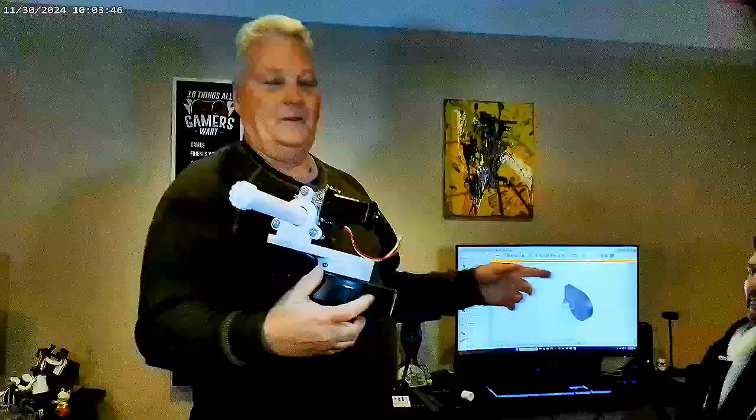So I had to have somebody do that, and Pete, my son, designed this and did it on a 3D printer. So this is my son Pete, and he'll explain how that's done on the computer. This is new technology being used on old technology.

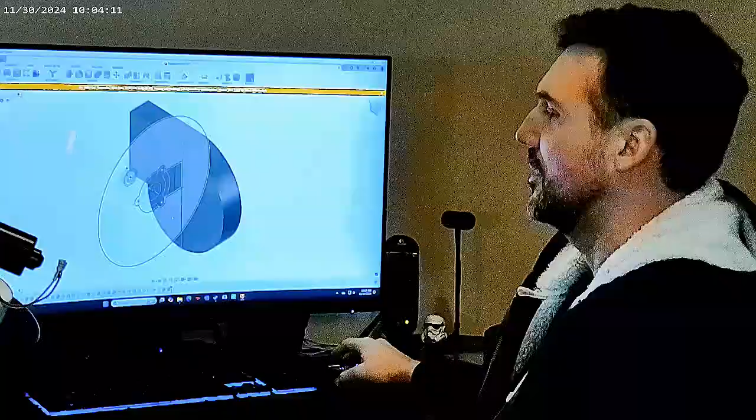Yeah, so we measured the dimensions, started with the blower, had to measure it and figure out ways to mount on it. And they had a nice piece on this side over here. So I got those basic measurements of the blower, and I just did a block diagram in there, and then drew some sketches of the different shapes that I needed to build out of, and then I just started building from there.

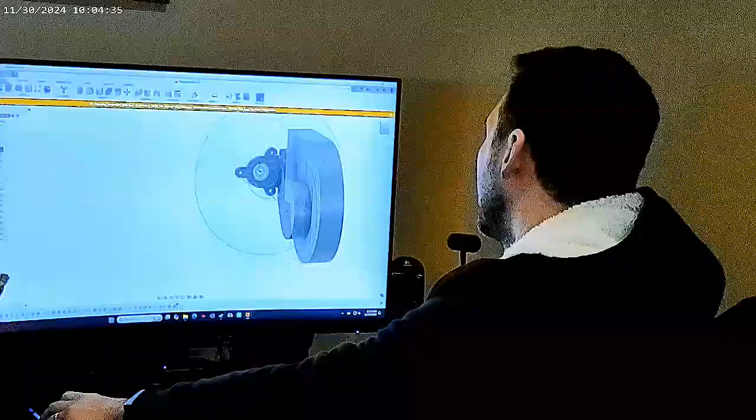We started with this bracket over here, so I can hide this. So we made a two-part, two-piece part on a mount, because you can't 3D print it in that shape, so that's why it has to be two pieces. So you can print flat.

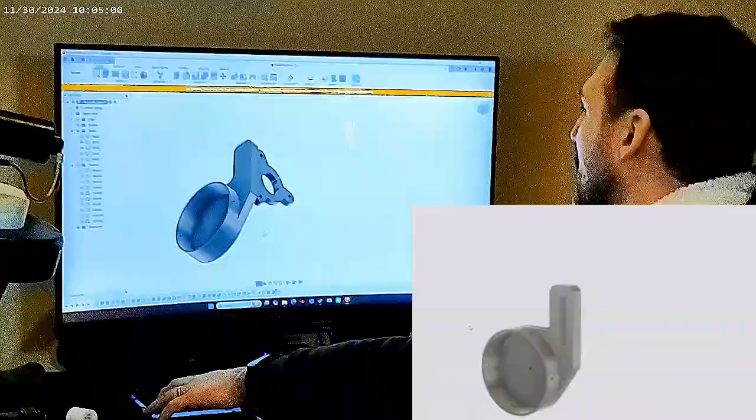This part and this part are two separate pieces. Here, if I hide all the sketches, you can see the two parts right there. So this one printed flat on this side, on that bottom part. That's how it went in the 3D printer. And then this one just printed on, it can print on either side. So we printed two parts and then super glued them together, because plastic super glues together well.

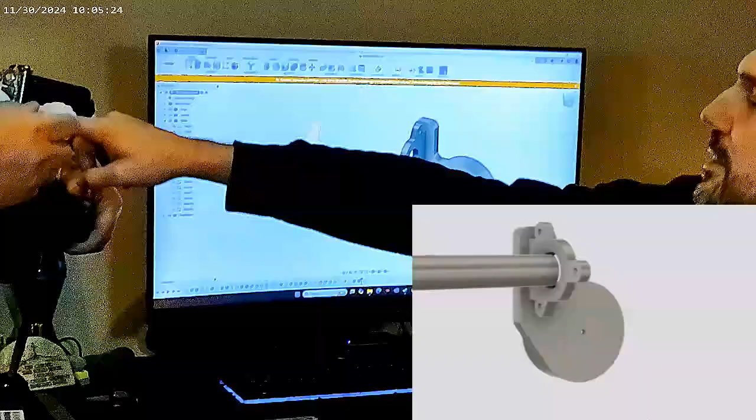And that's the mount that you see right there holding the motor. And then we needed something to stick onto the motor, because then we're going to put a bubble-like screen out here to pick up the soap and then pull it in front of the blower. And then this is also the nut that was made to mount it on there.

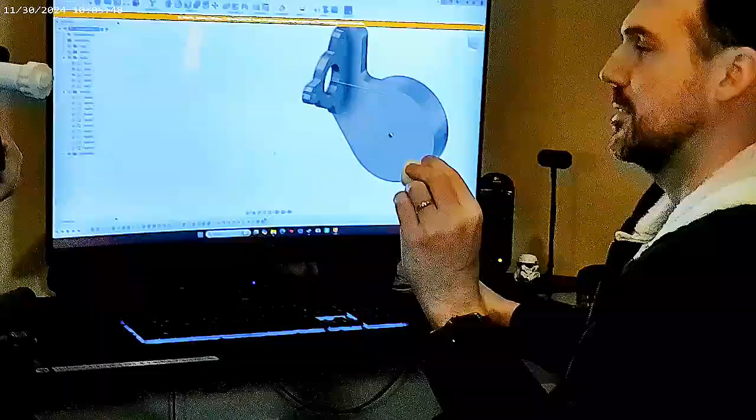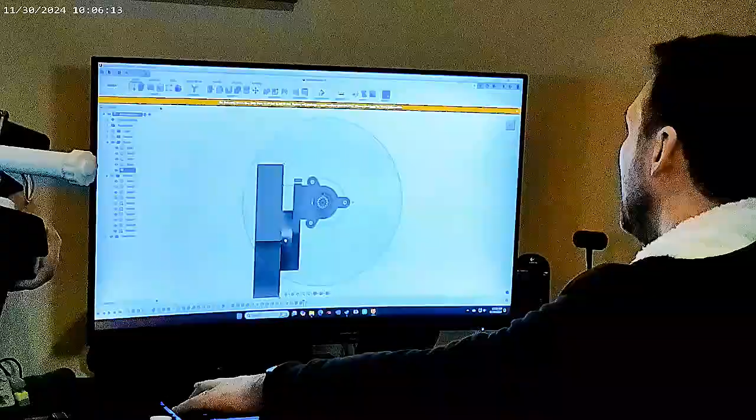So to do that, I took the shape of the gear and figured that size out, something that would fit down onto the gear so it can hold it on there, and then designed the shaft based off of that with some threads, and then a nut to hold on whatever solution we come up with for that part. And then you can see, if I bring these back, that's the next part we got to build: something, a circle shaped thing that'll spin around, pick up bubbles, soap in the bottom, and then pull them up in front of the blower.

And so, can you explain how 3D printing works? Yeah, so there's a filament, and I can show you that. We can explain that you also make candles, and mention his website. Well, Pete has stuff on My Maker Co, all one word, My Maker Co. There's a QR code, not ready yet. There's some candles among us, candles being made.

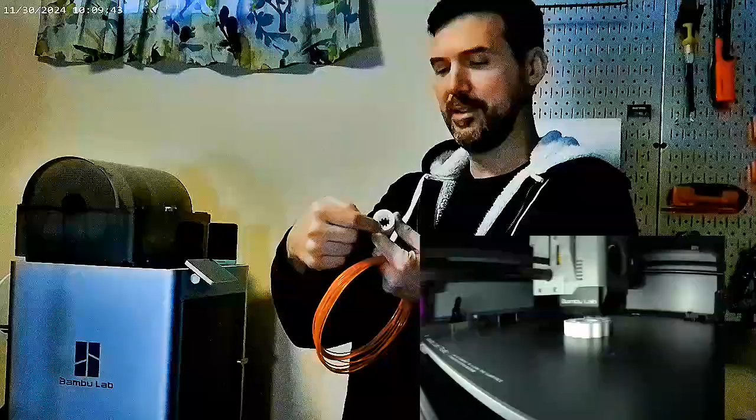Coasters. Okay, 3D printing works by taking a filament. This is plastic filament, there's different materials. This is polylactic acid, or PLA, and it melts this. There's a nozzle in there that heats it up, and melts it down to real small, like 0.4 millimeters is the nozzle I used. And then one layer at a time, it draws it out and just puts layer on top of layer, and you end up with your 3D printed part.

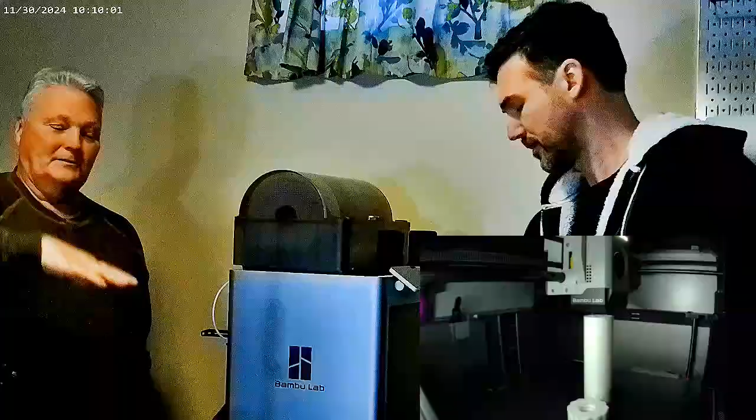So for the old tech people, that is like the inkjet printers they used to have, and it would shoot ink onto the paper. You're doing the same idea here, except you're using plastic instead of ink. And it can build not only just one layer, but it can build layers up. This is where it sets up and decides there.

Yeah, this is the printer. So these are the three, I have 4 different filaments up there. How long did it take you to learn how to operate, program and operate this? So talk about your background a little bit, where you got into this.

I started drafting in high school, and using 3D CAD stuff, which is what you need to do if you're going to make your own things. But I had a cheap 3D printer, so I've always been doing CAD, 3D drawing as a hobby. And then I got a 3D printer. The first one was a cheap one. Takes a little bit more skill to get things to melt the right temperature, stick to the bed, and work out the way you want it to.

This one's a lot easier. You almost plug and play as long as you have the file. You just upload it.

Do you think the technology has gotten better as they're developing these, and is computerized stuff helping that, or what's helping develop this better? Yeah, so computers, smaller, cheaper sensors like LiDAR and accelerometers, all that goes into making this a lot better. This machine can sense its own vibration, so it can move even faster and dampen out or account for that vibration.

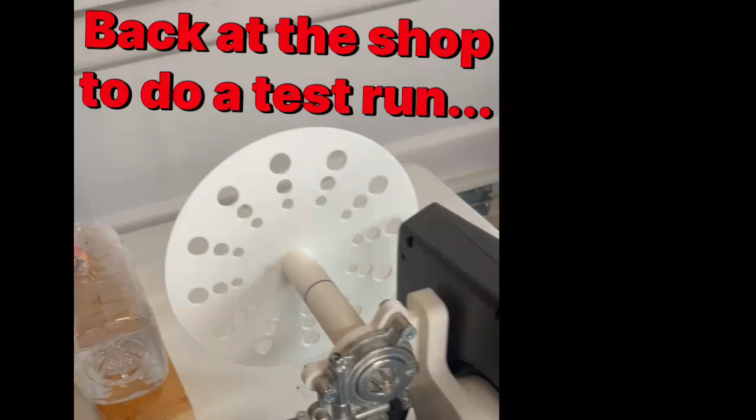All right, so this is the bubble machine that has been assembled now, and we're going to give it a test run. You can see those 3D printed parts I've shown earlier in the video, and this is just a test run container.

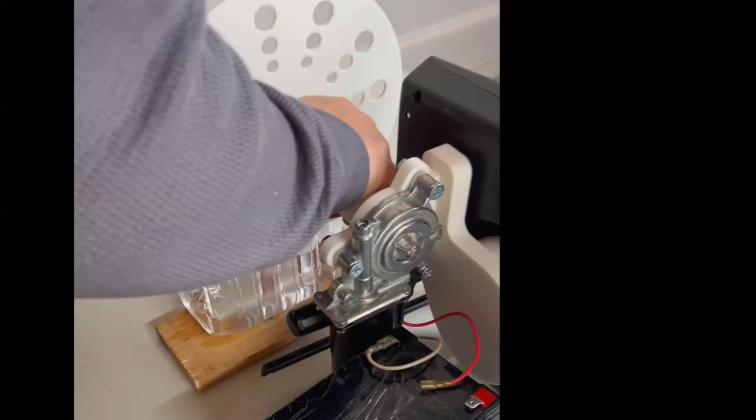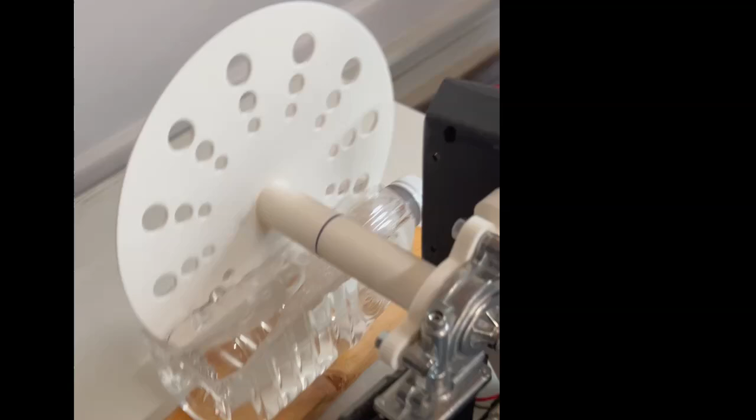I still got to build a mount to mount this on, and I got to find a better container. This is a temporary container made out of an ocean spray juice bottle thing, with a slit cut in it, and then just water and bubbles mixed up. I don't know why it's working.

So it's picking up the soap. Now he's just going to test it using a drill, which will be in place of the engine, but this drill is just going to blow the fan, work the motor that's blowing the fan blower. It's just a test.

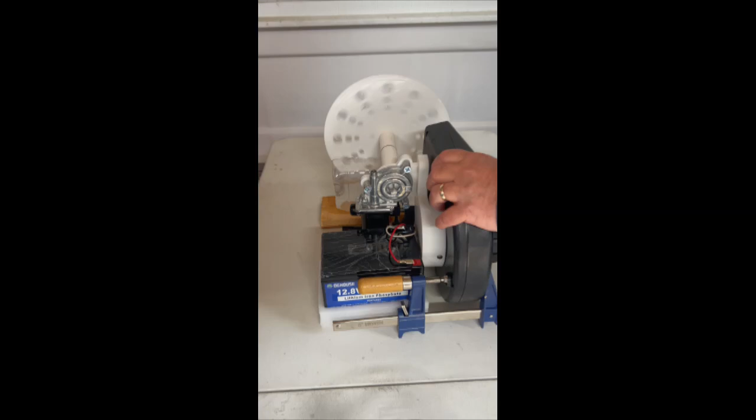I'd say it's blowing bubbles. So what do you gather from that? Well, I can make it work a little faster. I'm running 1,750 RPM. So we made bubbles.

Lots of bubbles. I gotta figure out why this is warping. It might be because of the hot water I put in here, and I gotta build a better jug container, and then I gotta make a mount for this, and a pulley so it'll go onto an engine like one of those over there. That's the goal, to run that engine, to turn this pulley, to blow this air, to make bubbles come out.

We made a lot of bubbles. Hopefully we'll take it to the tractor show in Florida in February.

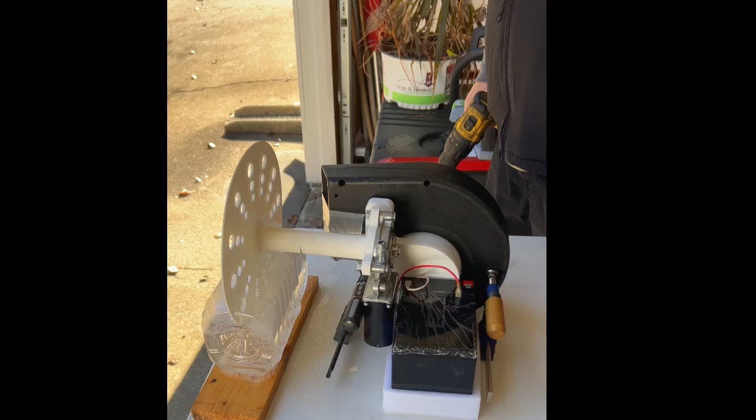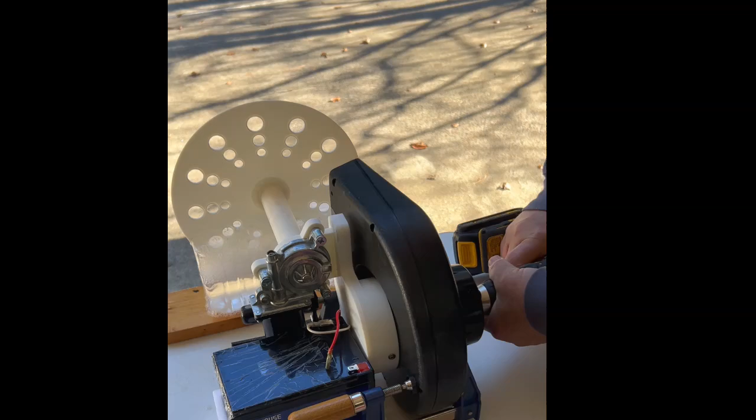Okay, so I made some adjustments because we were piling up a lot of suds right here in the front. I moved it to the outside, I'm going to put it outside now because I got soap all over the floor. And this is running at 1,750 RPM, so I'm probably going to have to go a little faster than that. I can do that with the gear ratio on the other motors. So I'll hook the battery up. Also, I found out why it's warping - the water's too hot.

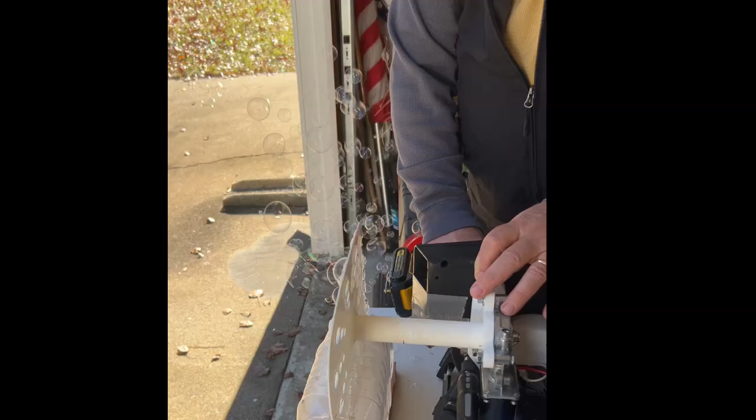Oh, much better. Oh, yeah, you got it. Oh, we got a bubble machine. Of course, they're blowing back in the garage. Oh, that's great.

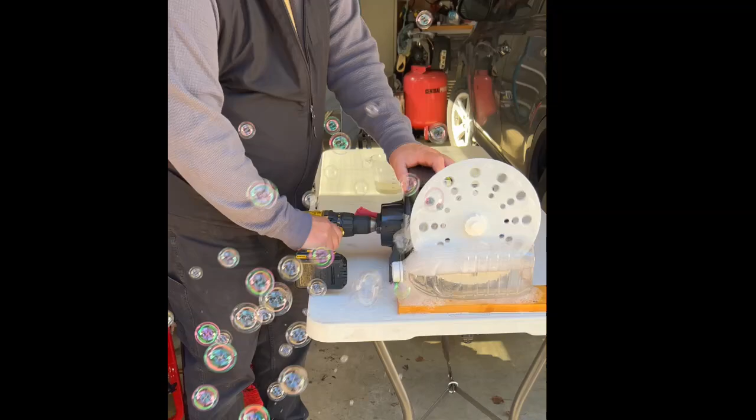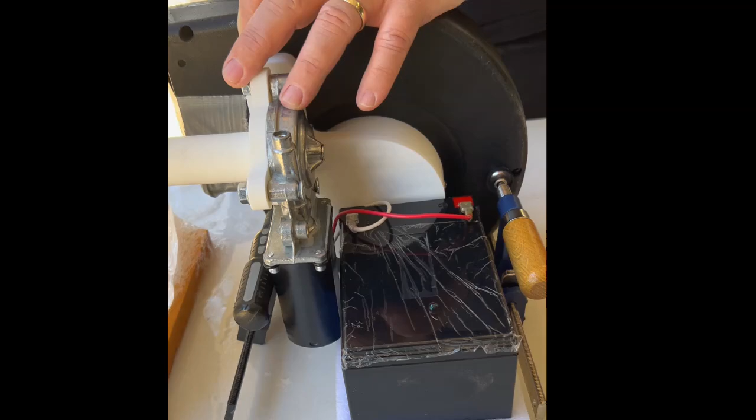Actually, 1,750 is not too bad if it wasn't blowing back. I think it needs a little more. Maybe bring this closer up here. Did you block off some of the air? Yeah, I did, so that I had more volume coming up here instead of a wide area. If I went faster, it would do the same thing.

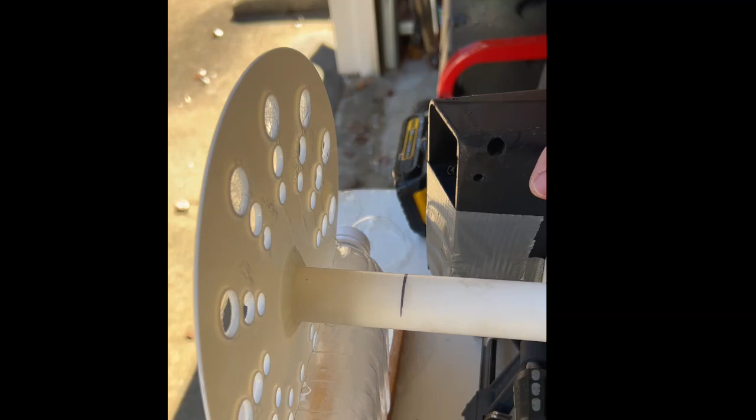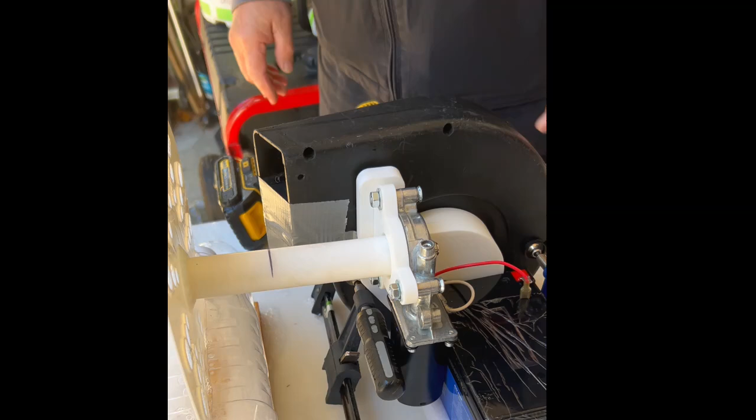But I think I was blowing the bubbles in here, coming out here, so I needed to consolidate it to one area. So this is closer to what I want. Just like I said, I got to build a bracket, I got to build a tank, and probably a nozzle here that'll come up to one area.

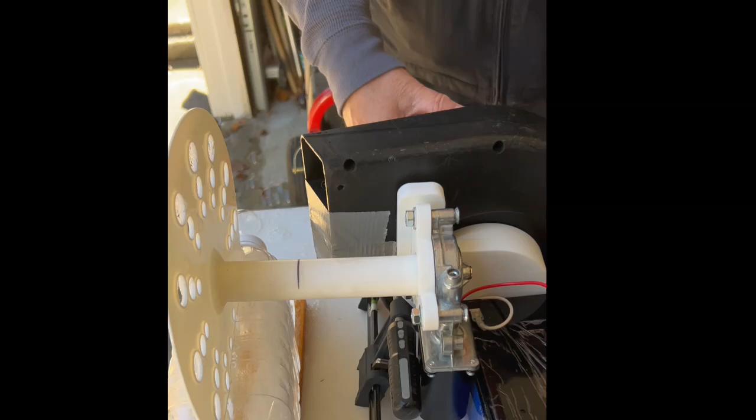And I got to build a pulley and figure out the ratio to that 5 or 4 inch or whatever I got over there. Pete could 3D print something that'd snap on there. Yeah, he can do that.

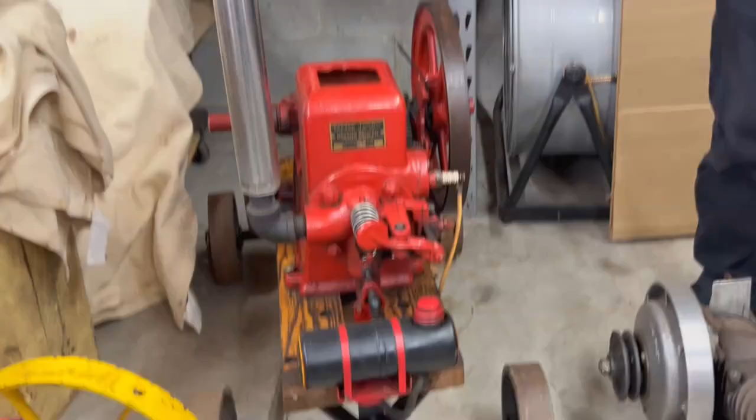It'll work, but I got to have a mount, something to hold it to the ground. Take a picture of these together - this is a Maytag on the right, little jumbo on the left. It could run off either one of those. The Maytag's just a washing machine engine. You could run it off that? So that would be one of the two. I've got more in it. This is what I'm looking at, trying to run off of.